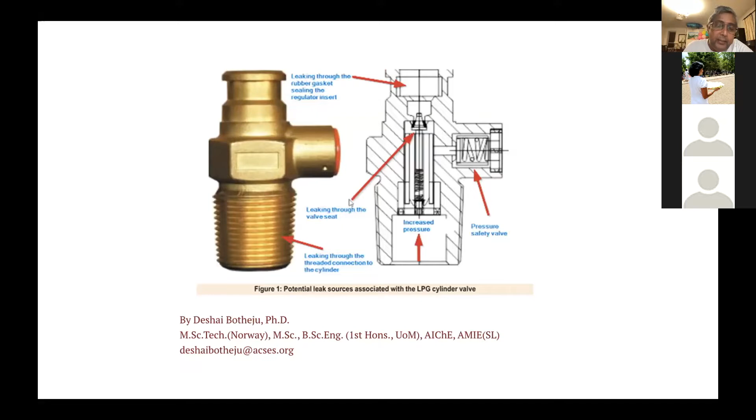So we know that we had an unexpected problem in Sri Lanka a couple of months ago, where domestic gas cylinders started exploding, and there were some fatalities as well. There were a lot of discussions and presentations. And here is the conclusion: Sri Lanka's mysterious gas explosions become nobody's baby. So you can see the way we are handling issues is not really up to date or national friendly. Sad but true, that is what's happened to most of our problems, and we don't find proper solutions, and therefore we actually start going down as a country, not really improving.

So domestic gas explosions happened in LPG gas cylinders, liquid petroleum gas cylinders. And there were more than 400 reported within a week in December 2021. Many were injured and there were some fatalities.

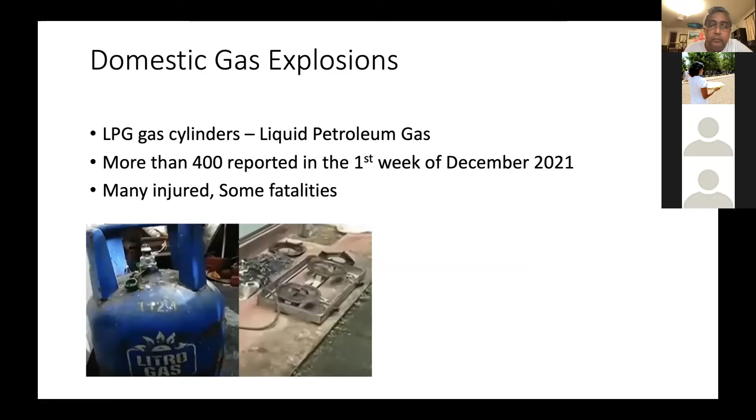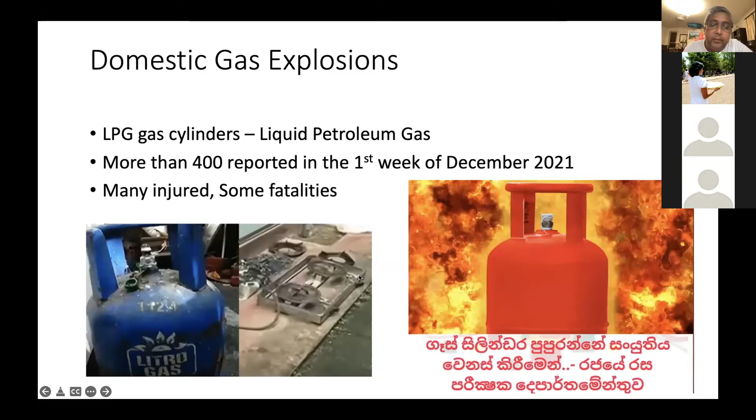So later on, the government issued this statement, gas cylinder පුපුරන්නේ සංයුතිය වෙනස් කිරීමෙන්. So there was something to do with the composition of the gas in those cylinders. Why I got interested and understood the article quite well is because I use medical gases. This was a very good article that explained the whole story.

So liquefied petroleum gas, in short called LPG, is derived during crude oil refining or natural gas processing. There are byproducts generated during the production of liquid fuels, and these byproducts are the components that form LPG. The key components of typical LP gas would be propane and butane, but there may be other compounds there as well. And I will invite Dr. Botheju at the end of this to present more information about this.

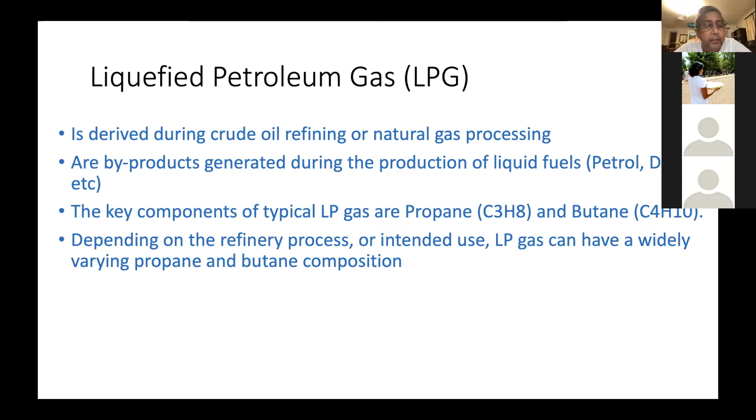And depending on the refinery process or intended use, LP gas can have a widely varying propane and butane composition.

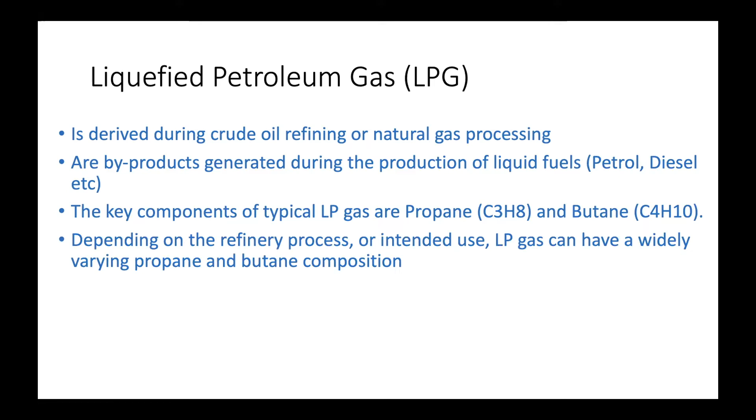So it's a gas mixture that you have in these LPG cylinders. There's propane, there's butane. Now, the boiling point of propane is -40. At that boiling point, above that temperature, that would be a gas. The boiling point of butane is -0.5 degrees centigrade. So at that point in atmospheric pressure, above that temperature, all that will be a gas as well.

But the boiling point changes if you pressurize. These are the boiling points at normal atmospheric pressure, which is 1 bar. However, if you look at propane, the saturated vapor pressure, which I will explain a little later on, is 124.5 pounds per square inch, which means 8 bar, roughly. That means 8 times the atmospheric pressure. Whereas the butane saturation vapor pressure is 31 pounds per square inch, which is 2 bar, roughly.

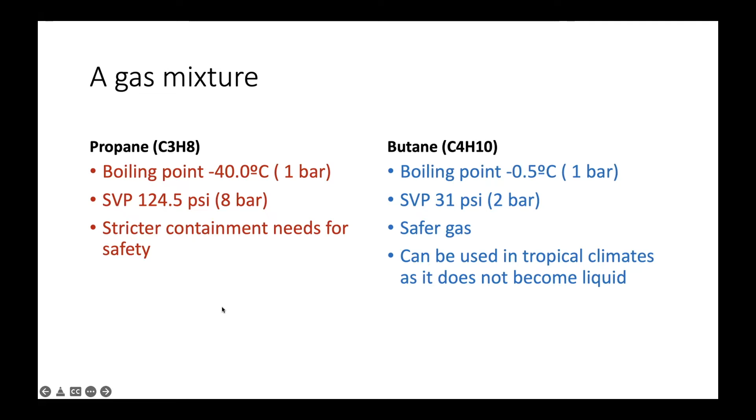So if you're using more propane, you need strict containment for safety, because normally this gas will have a higher saturated vapor pressure compared to butane. So butane is generally a safer gas, and it can be used in tropical climate as it does not become liquid at 1 atmospheric pressure. Okay, so let's take it a little bit further and see.

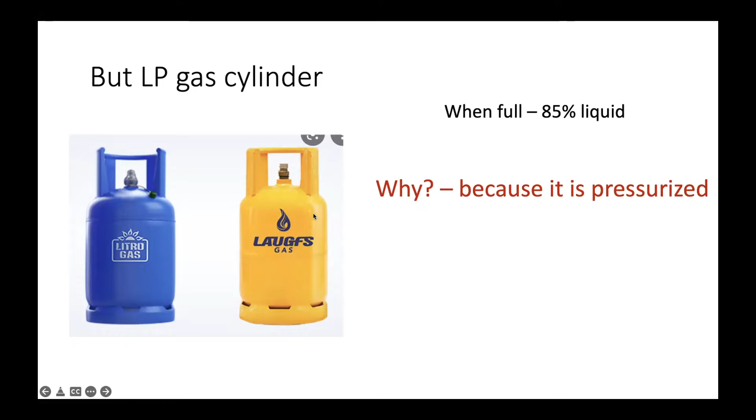The typical gas cylinders delivered in Sri Lanka, when full, 85% of that is liquid. How come a gas that has such a low boiling point becomes a liquid in these cylinders? This is because when pressurized, these gases become liquid. Here is an example from our medical gases, so you'll understand it.

See, oxygen, the critical temperature. The critical temperature means that above this temperature, whatever the pressure you use, the oxygen cannot be liquefied. So you would have seen liquid oxygen containers in hospitals. And this liquid oxygen will have to be kept at very low temperatures.

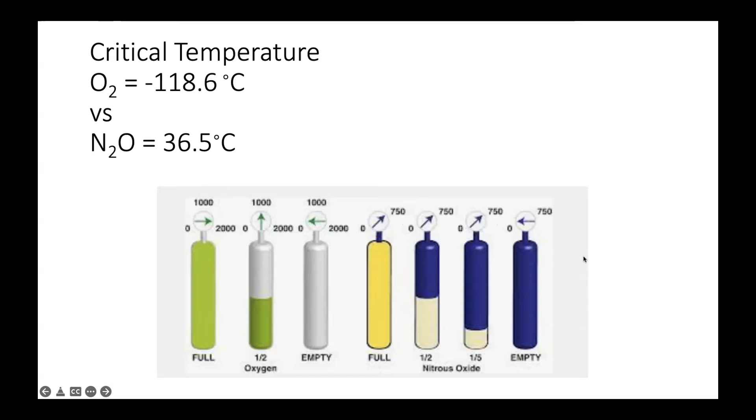There's no liquid. So when it's emptying, it's the pressure that will go down, and you'll have to see from the pressure gauge how much gas is left in there. But when the gas is liquid, the saturation vapor pressure will maintain this pressure inside. And when the cylinder empties, the pressure will remain the same right the way through until the liquid has completely evaporated. So there is a difference when you have liquid in pressurized states.

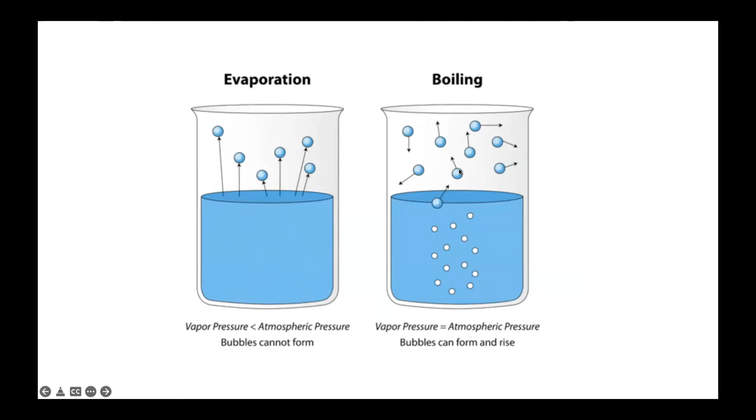So here is water. Normal evaporation, the vapor pressure is less than atmospheric pressure, so it evaporates. But when the vapor pressure gets equal to atmospheric pressure, then it's an equal state. That's called the boiling point. Now, the vapor exerts a saturation vapor pressure. And the critical temperature I've explained to you. Let's go further and see how this vapor pressure may have affected this problem.

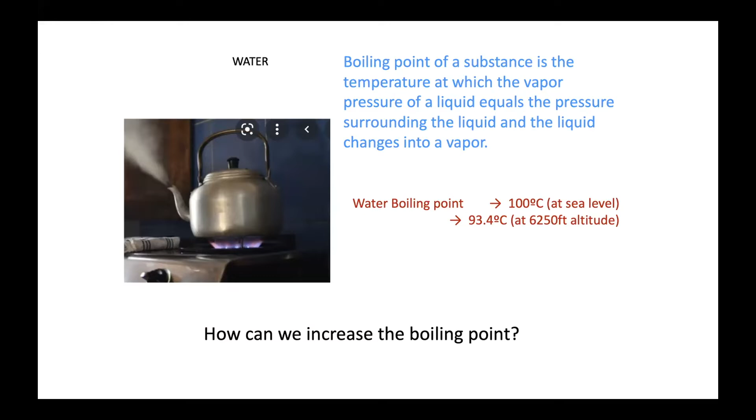So I told you that the boiling point of a substance is the temperature at which the vapor pressure of a liquid equals the pressure surrounding the liquid, and the liquid changes to vapor. But this boiling point is atmospheric pressure dependent. For example, water will boil at 100 degrees centigrade at sea level. But you go to Pidurutharagala, right at the top of the mountain, at 6,250 feet, your boiling point comes down, so the water will boil at 93 degrees centigrade. So this is how the atmosphere, the temperature, the pressure within the cylinder can affect the safety of the gases that are contained.

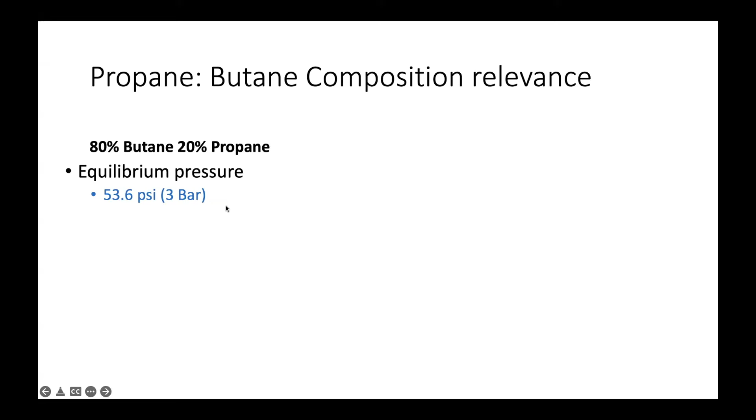So let's compare the two compositions, okay? Now the propane-butane composition normally has been 80% butane, 20% propane. The equilibrium pressure in this mixture has been 53.6 pounds per square inch, which is about 3 bar, which is 3 times the atmospheric pressure. That's the composition that's been used in Sri Lanka for many years, and there have not been very significant problems. That's probably because all the regulators and safety standards were designed and constructed for this operating pressure. So 3 bar is the operating pressure it was constructed for.

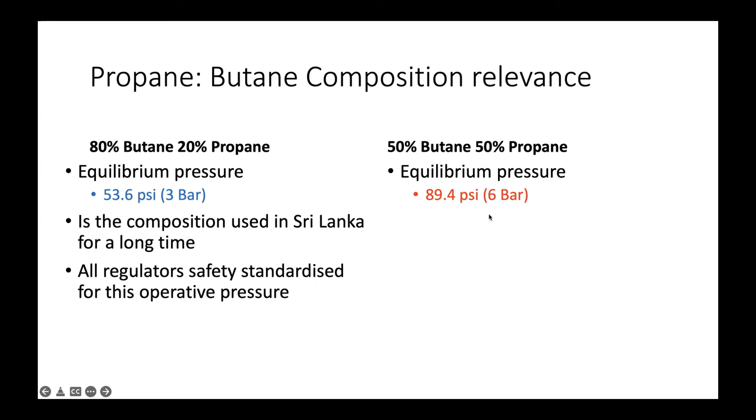But if you put in 50% propane, equal concentrations like that, then the equilibrium pressure within the cylinder goes up to 89.4 pounds per square inch, which is 6 bar. So it virtually doubles. And when the pressure inside the cylinder virtually doubles, these regulators may not stand that, or they're not designed to stand that pressure. So leaks can happen. The new composition can do that.

So the pressure virtually doubled in the LPG gas cylinders because the composition changed. The cylinder is likely to be safe, but the cylinder valve could be unsafe, now that it's working at a higher pressure. The valve connection to the cylinder could be unsafe. The regulator connection to the valve could be unsafe. The regulator is probably unsafe. Then the hoses and hose connections we use at home could be unsafe for these higher pressures. And the appliances and gas cookers are probably unsafe because they're not designed to be used at higher pressures.

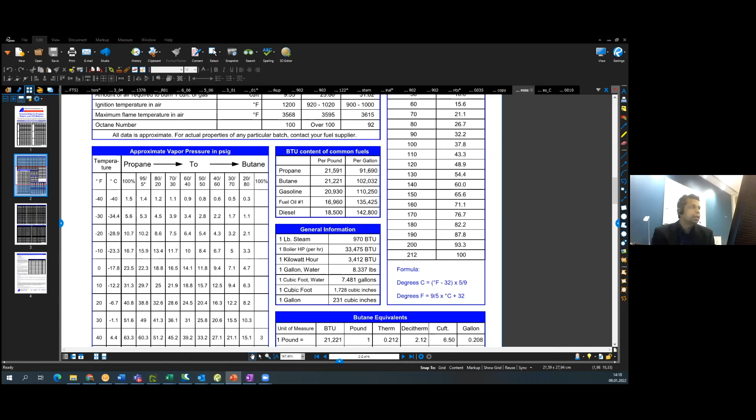So I can even show you one thing. I just got into a little presentation mode, because I wanted to show you this one. So I get to my screen. You see my presentation? Yeah, you can. Okay, I will show you this one.

But you know what? Then what I did was, here in Norway, I just went to a hardware shop and looked at a typical regulator. This is what I found. I have to tell you one thing. In Norway, we produce a lot of gases and petroleum, but we never use gas at ordinary houses for any purpose under normal circumstances. I will tell you what we use the gas for, but normally we don't use gas for cooking. We don't use gas for heating.

Basically, all gases produced here in Norway we ship out through the gas lines to other European countries to be used. Or the remaining gas we send back to the oil reservoir, so that we can use that gas to pressurize the reservoir and increase the oil yield. Because for any country producing oil, gas is not the most important or the most valuable thing. The oil values more. So normally we really like to have a reduced amount of gas and more oil. So most of the time, the produced gas is injected back to the reservoir so that we can increase the pressure and get more oil. So that's an extra point.

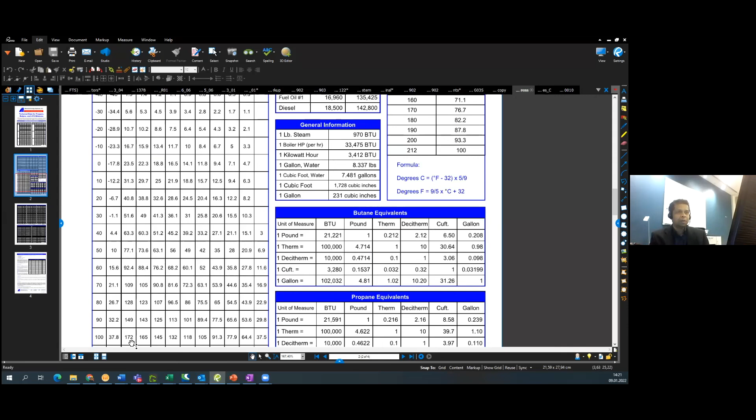So if you want to increase your propane concentration, then you have to have your infrastructure ready for that. That's the thing that went wrong for Sri Lanka. We increased it for whatever reason. It is highly likely they did it for economic reasons or the difficulty of finding gas, because these days, like Chulananda said, gases are quite expensive and finding gas supply shipments is a bit difficult. So they went for whatever propane was available, but they didn't think about the infrastructure. That's part of the problem.

So to answer Mr. Kure's question, I think having this standard is a good thing, but that's not sufficient. We still have to pay attention to our infrastructure, because in an ideal case, if we had really good regulators, infrastructure, and domestic gas supply system, we would not have had this problem. Even if you think about cylinders leaking, you can see many cylinders were leaking. Why is that? It should never have happened, even at this concentration, because the valve on top of the cylinder must have proper integrity even with 100% propane. Concentration change is not an excuse for leaking cylinders. Cylinders should not have leaked even under that situation.

What happened was that apparently nobody changed out these cylinder valves regularly, because these cylinder valves are not meant for using forever. That's not the case, especially when you put this regulator cap into the cylinder valve. There is some gasket, and that also wears out, and the valve wears out. So all the things have a design life. Normally, I think this valve needs to be changed from the cylinder every 5 years or less. So that might not have happened.

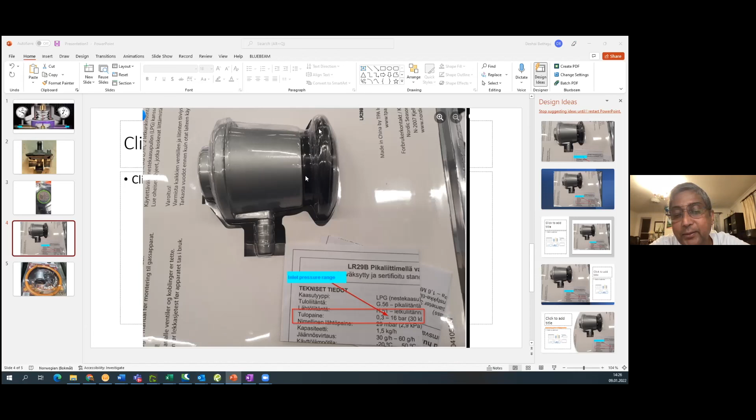Thank you. Yeah, great. So my purpose was to try to make the public understand the relevance of the regulator. It's good that somebody is trying to improve the regulation and control. But if the valve is the problem, then as Mr. Boteju said, the valves can be improved. That will give you a better safety margin for everybody at home. And unless people know what to look for in the valves, nobody will know what a safe valve will be. They just have to depend on whoever is marketing it. So this is why I think this kind of discussion will be more helpful widely, and with time, people will start to refer to what's been discussed.